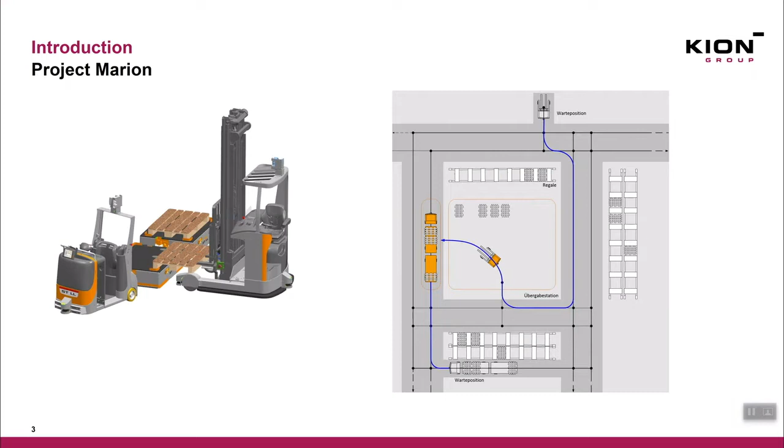Let me take you back to 2009, where a daughter company of KION started a project named Marion with the University of Hanover, in order to make two autonomous vehicles, a tugger train and a forklift, do loading and unloading tasks as shown in the figure on the right.

When implementing Project Marion, customers had worries. How can we service such vehicles? How can we adapt our infrastructure, and for how much money should we invest in such a process?

And from here came the part that, yes, we need research. Research is really important, but there is a step in between. In order not to confuse the customer or not to get unsatisfied customers, there is the iGo Neo step.

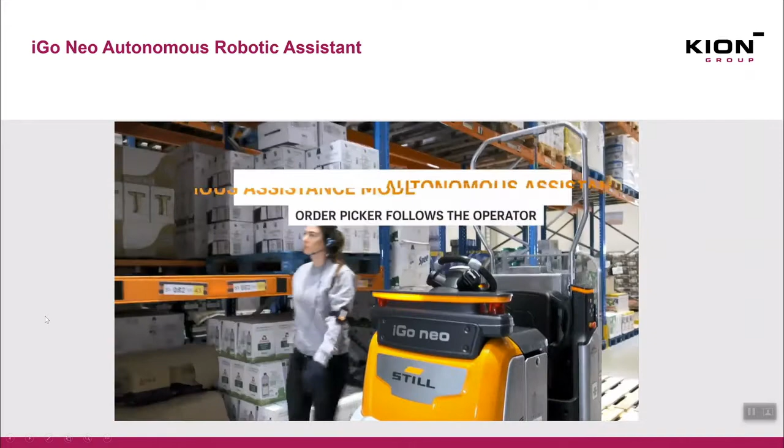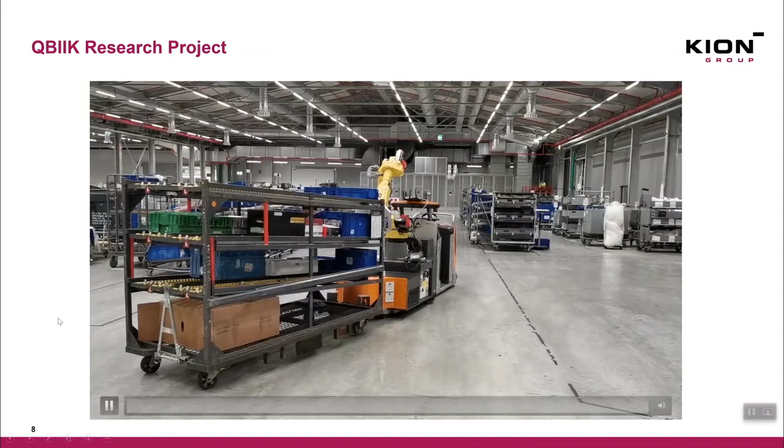In the next couple of slides, the research projects that are running at Still, the daughter company of KION, will be introduced. In research project QBIIK, which was a cooperation between Still and the Karlsruhe Institute of Technology, an iGo Neo was equipped with a FANUC arm.

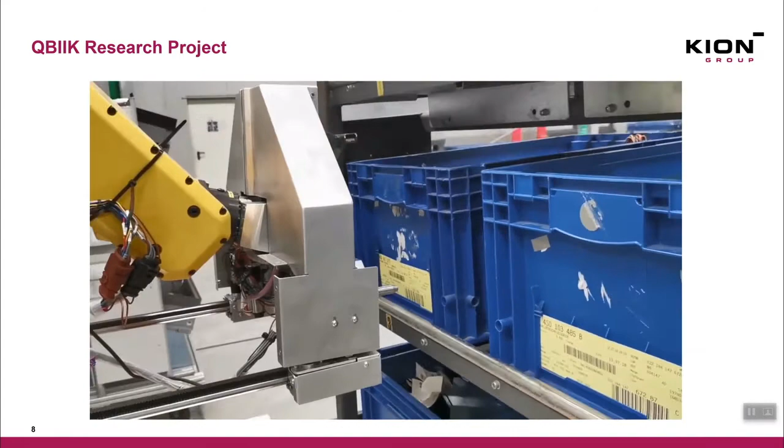It was required from the iGo Neo to drive to a rack autonomously, and using AI-enhanced algorithms, the FANUC arm was able to pick up Euro boxes and transfer them from a trailer to the rack and back again.

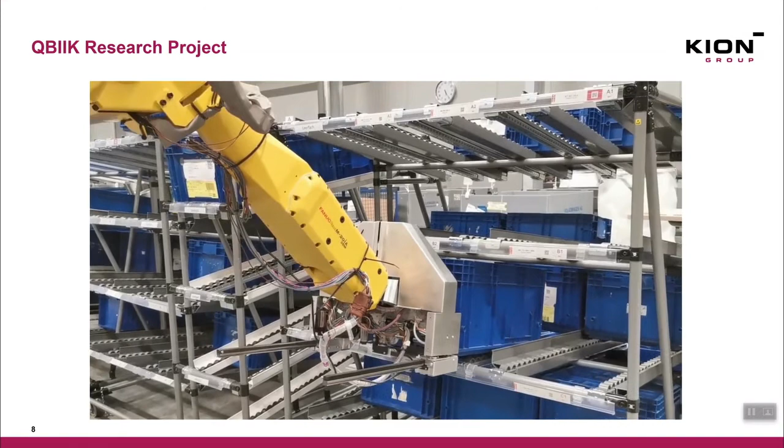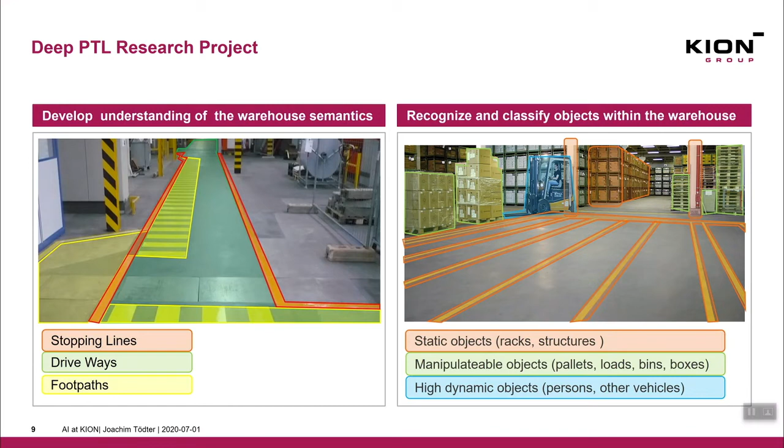In Project Deep PTL, which is a research project between Still and Freiburg University, the aim is to develop understanding of the warehouse semantics and the objects inside of the warehouse. This is in order to classify the objects as static, dynamic, semi-dynamic objects, and also to identify, for example, driving paths, pedestrian crossings, and signs.

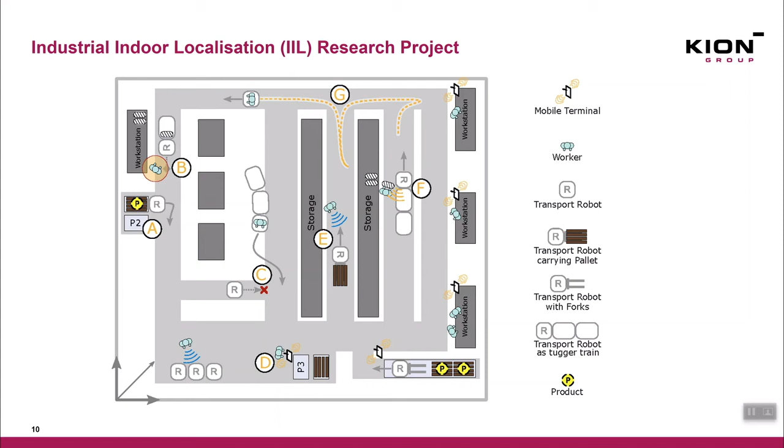In the Industrial Indoor Localization Research Project IIL, which is a cooperation between Still and the Technical University of Hamburg, the aim is to develop a platform that can be used as a unified data source. This platform can be used for service, development, and support for autonomous vehicles.